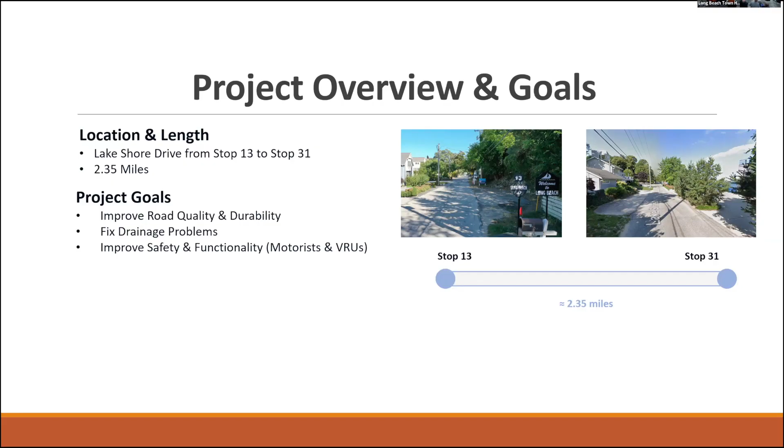And also, anytime we're doing a project of this scale, it definitely makes sense to take a look at improving safety and functionality, not only for the drivers on the road but also the other users of the road, VRUs, which are vulnerable road users. So that would include basically anybody that's not in a vehicle, so pedestrians and bicyclists.

So with improving the safety and functionality of the road, especially in the context of this road and this community, you want to at least attempt to achieve a complete streets approach, which is basically designing the road corridor for all users, not just motorists. So we want to provide some safe spaces for vulnerable road users. I don't think sidewalks are probably in the cards for this, but we can still accommodate them, and we'll talk about that as we go.

We also want to increase driver visibility and awareness, control vehicle speeds. Usually lower speeds result in safer roads, and then improve signage for drivers as well.

So as mentioned, we wanted to touch a little bit about this report that Haas and Associates has put together and is available on the website. Just really want to clear the air on that a little bit, because I think some people may have read it and misinterpreted what it is.

Really it's a document to determine the budget for the project. So we look at a couple of different conceptual projects on one end of the spectrum and the other end to understand the real scope in terms of cost mainly. Then, knowing the different costs we could have with this project, we project out the phasing based on the anticipated project funding mechanism, which is through a state grant. There's some talk in there about road widths and things of that nature, but that's just so we can understand a high end and a low end of what the project could be. It's not a design.

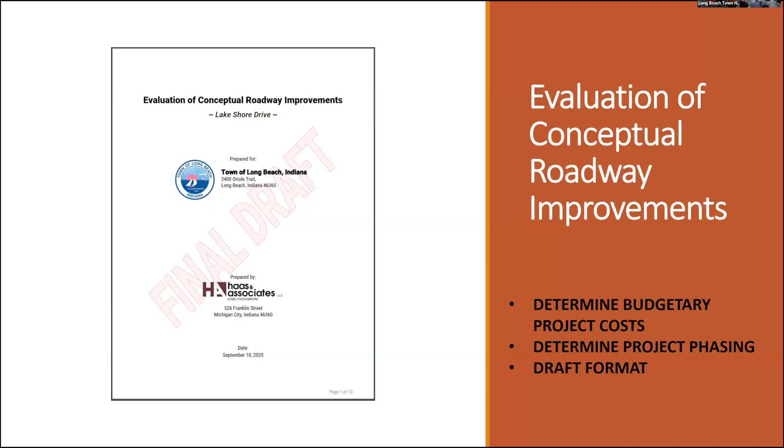As Joy mentioned, we're still very much in the conceptual phase and need input from the community. So the final point here is that this is still a draft document. We're in the conceptual stage, it is not finalized yet, and we are also not in preliminary design yet. There's still a lot to happen before things really get moving on this project, and input from the public is very important and necessary.

So with that, I'm going to go ahead and turn it over to Sam.

Good evening, everyone. So the pavement along Lake Shore Drive exhibits visible signs of aging, as shown in the photo, with multiple types of surface distress, including reflective cracking. According to town officials, the road was last paved in the 1990s, and prior to that, the original concrete pavement has been paved over time.

Reflective cracking occurs when cracks or joints in the underlying pavement layer, typically concrete or asphalt, propagate upwards through the asphalt overlay. It's termed reflective because the crack mirrors the distress in the underlying pavement, which reduces the ride quality and durability of the road. In addition, differential settlement resulting from variation in the base material across the road cross-section contributes to this type of crack. Once the crack forms, moisture infiltrates into it, and because of the freeze-thaw cycle, the road deteriorates further, reducing ride quality and shortening the pavement's service life.

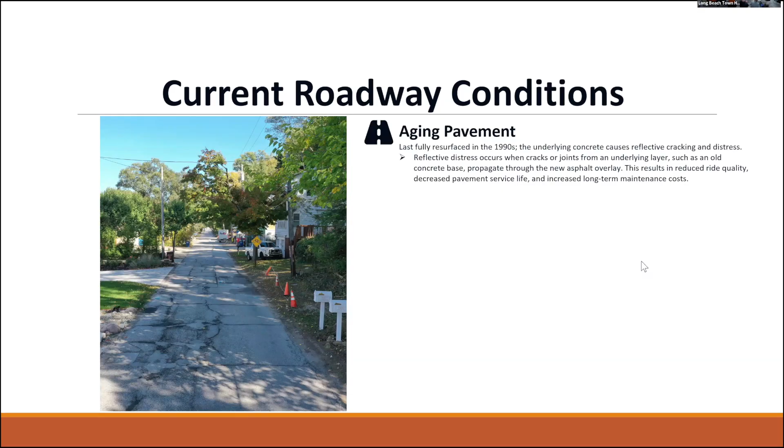Next slide. Now, core samples were obtained along Lakeshore Drive, and they confirmed the presence of concrete underlayment along the roadway. However, the lateral extent of this concrete underlayment was not verified and has not been verified.

As you can see, we have three representative core samples shown on the screen. The first one shows about 7 inches of concrete, and you can visibly see that the asphalt has been overlaid over time. The same is true with the second one, with the broken up concrete underlayment that will likely reflect and cause reflective cracking on the surface. The third core sample does not show much concrete at all. So that's how it varies along Lakeshore Drive.

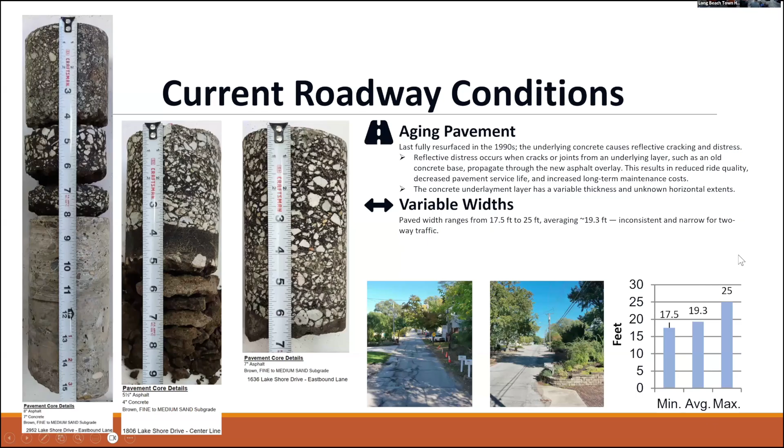Also, more than 50 cross sections were measured along the road corridor from stop 13 to 31, revealing roadway width that varies between 17.5 and 25 feet, with an average road width of 19.3 feet. The roadway is currently being shared by motorists and vulnerable road users, and currently, as we all know, there is no continuous sidewalk along the corridor.

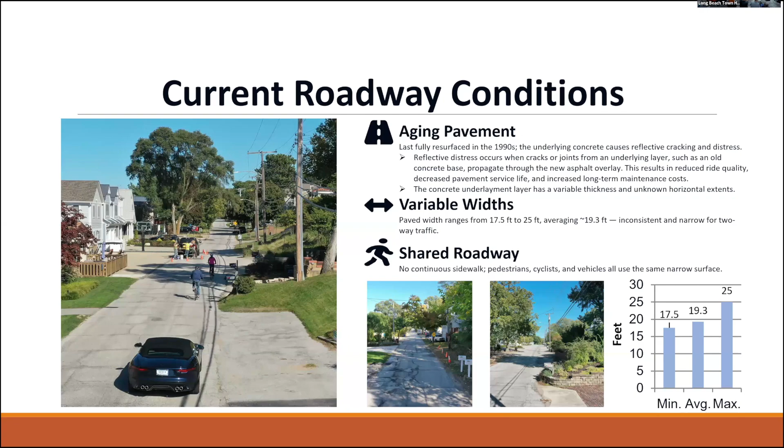And I will turn it over to Ryan to talk more about the technical standards that are relevant to this project.

Thank you, Sam. So before we get into more details about pavement strength, pavement durability options, and some of the functional options available for the road, we want to touch a little bit on technical standards. We think of these in two different categories: some are requirements that must be adhered to, and others are more like guidelines.

Some of the standards we need to adhere to include Indiana code, local code—that'd be Town of Long Beach code—and the guidance in the Manual on Uniform Traffic Control Devices. That's really a federal requirement for all states, and it covers signage, lane markings, lane widths, and things of that nature. Then naturally there's the Americans with Disabilities Act, which governs how roads are designed for people with disabilities.

We also have other standards, more like guidelines, that don't necessarily have to be adhered to for this particular road. This may include things like the Indiana Department of Transportation Design Manual, which would be very applicable for a state road like a highway, but that's not what we have here—we have a local road. Another one would be the AASHTO Green Book. AASHTO stands for the American Association of State Highway and Transportation Officials, a very detailed, highly regarded, nationally applicable standard for designing all kinds of roads, from highways down to local roads. A very useful document, but it does not need to be strictly adhered to for this particular road.

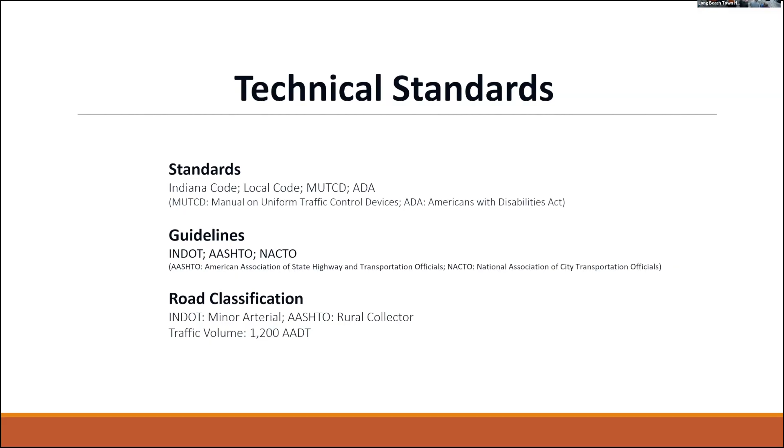As we move into the functional possibilities for this road, it's important to consider what classification this road is, since depending on who you ask, it might be classified differently. To illustrate, INDOT classifies this as a minor arterial road. Arterial roads—even minor ones, as opposed to major arterial roads—are generally higher volume roads with higher speeds, meant to get people from point A to point B. If you look at how AASHTO would classify this, they would tend to classify it more as a rural collector road. I know this isn't in a rural area, but that's still how it would be classified—quite a difference in how they consider it.

In our minds, looking at this from a design standpoint, we're thinking of this road as a major collector. You have your local roads out in front of your house, which feed into a slightly larger road, and those roads dump into Lakeshore Drive. So we think of that as more of a major collector that feeds out to Castleton or Moore Road, which are more arterial roads.

Traffic volume on this road has been measured by INDOT at approximately 1,200 vehicles per day. That's an average value for a given day, averaging out highs you might see in the summer and lows in the winter—so it's an average, but useful for comparing it to other roads.

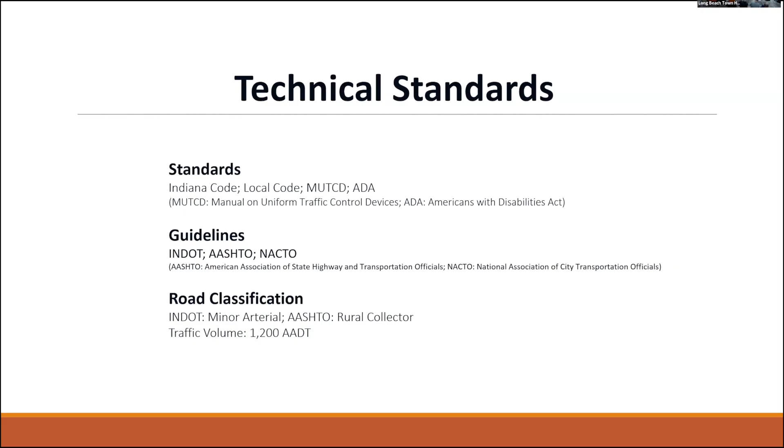With that, we're going to move in and talk a little about pavement strength and durability, and what options are available to the town to improve the quality of the road. After we get through that, we'll talk more about some of the functional elements of it. So with that, I'll pass this over to Sam, and he can talk to you about the pavement quality.

There are three pavement improvement options evaluated for Lakeshore Drive. The first is milling and paving of the roadway. This option involves milling and resurfacing the existing pavement surface. While it provides a smoother ride compared to what it is right now, it does not address the non-uniformity of the underlayment. The estimated service life for this treatment is approximately 5 to 10 years.

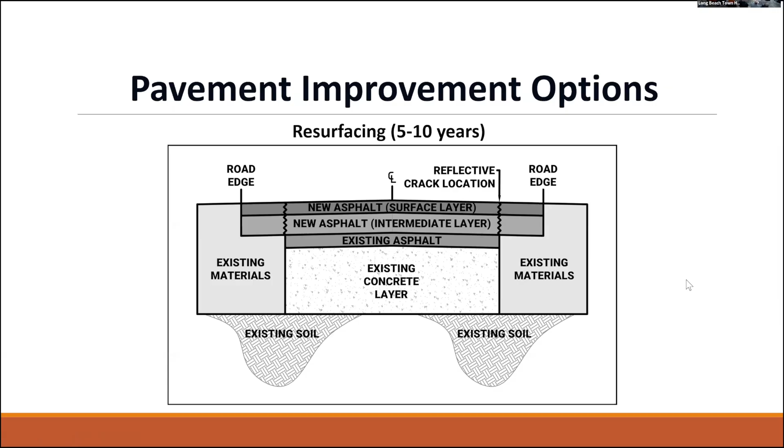The second option being considered is base strengthening—that is, strengthening the base adjacent to the concrete underlayment with good base material, then resurfacing the road while also reinforcing the asphalt layer. This is actually more durable than the first option presented, with an estimated service life between 10 and 15 years.

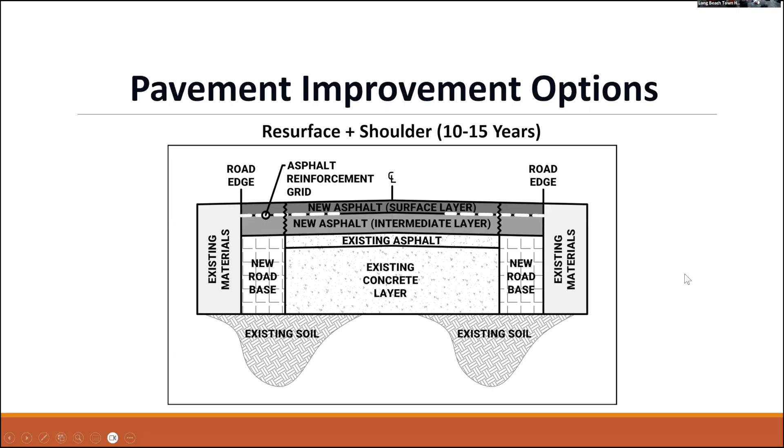The last option, a premium option, is the complete removal of the existing concrete underlayment and replacing it with good base material. This option will be the most durable of the three, with an estimated service life between 20 and 30 years if taken. With this, I'm going to turn it over to Ryan to talk about the functional improvement options.

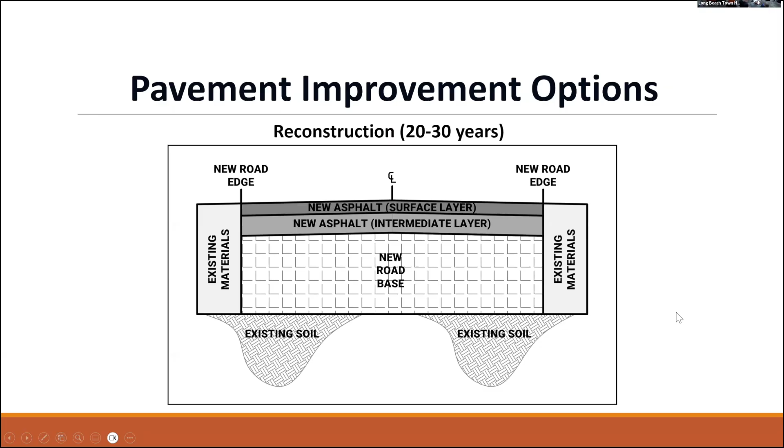Okay, so we're going to talk about a few different things regarding how this road will be designed and how it will function, starting with lane widths.

Under certain circumstances, narrower lanes can promote lower speeds, which in turn reduce crash severity. That's especially true when the road speed is around 30 to 35 miles per hour. In this case, the road speed is 20 to 25 miles per hour, and in that circumstance there's not any statistical evidence that lane width actually has an effect on crash intensity or frequency. Really, the controlling element there is speed, not lane width.

So in our case here, the decision is really more about maintainability and how best to use the limited right-of-way available to the community. So there's some different options to consider when thinking about lane width.

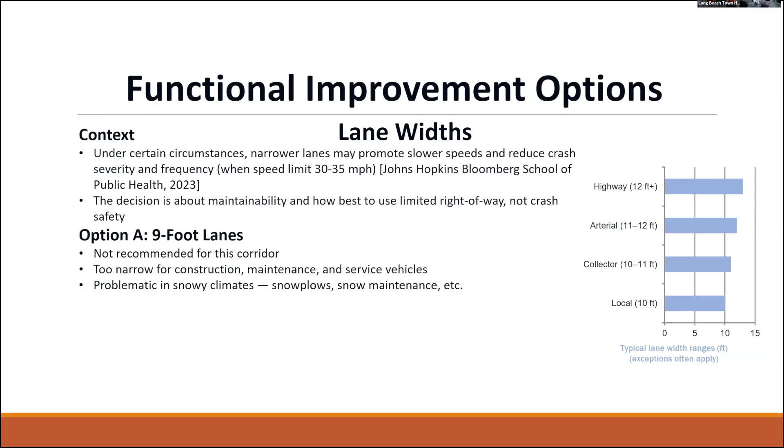9-foot lanes are a possibility, although they're really kind of too narrow for this particular corridor, especially given some of the construction and maintenance vehicles that tend to occupy the road. 9-foot lanes can also be somewhat problematic for snowy climates, and this area, as you know, can be subjected to lake effect snow.

So for those reasons, 9-foot lanes is not really a preferred option. 10-foot lanes is more preferable. It's kind of a balance, and it has a better ability to accommodate some of those bigger vehicles. It also gives a little bit more space for vulnerable road users, and again doesn't limit access for essential vehicles.

11-foot lanes, you're starting to get up there a little bit. There's not a lot of added benefit there, especially if you're not a heavy truck freight route or a bus route.

And as you start to increase those lane widths, you can tend to have a little bit more comfort for drivers, which can make them feel like they might want to go a little bit faster, which again can kind of increase the frequency of crashes.

So the town is kind of leaning towards 10-foot lanes right now, but that's really just a placeholder while waiting to get input on all these different topics from the community and make final decisions as we go.

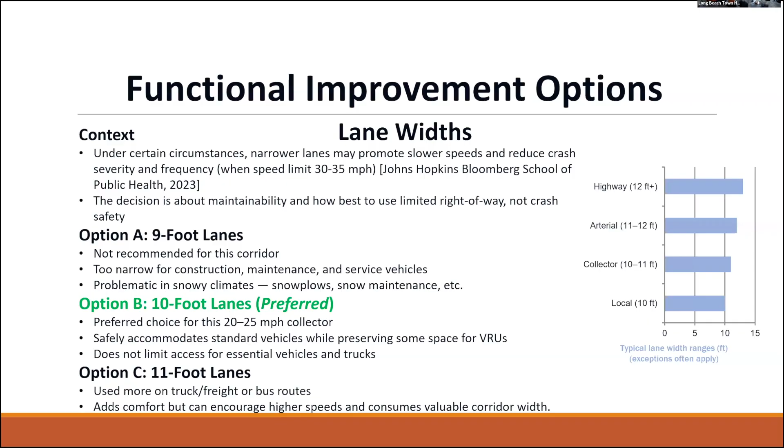So the next concept here is center line markings. As you can see here, everyone's familiar with these. They're actually optional for this type of road, and in this context you don't need to have one. So one option is to not even put a center line in there at all.

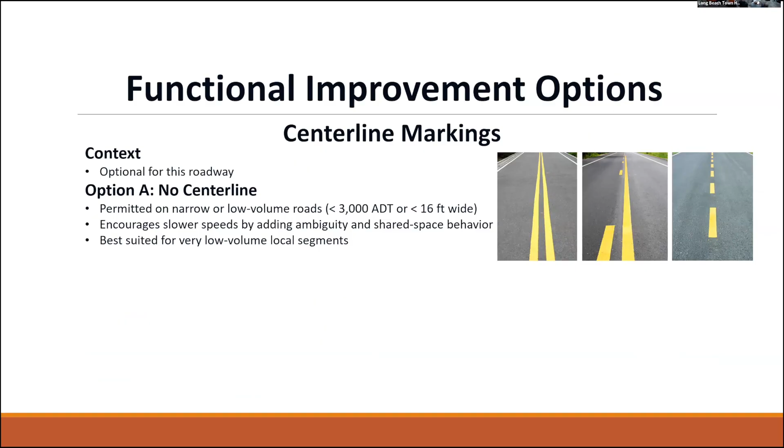That has some different trade-offs. It can encourage slower speeds for drivers because it creates a sense of ambiguity about what's happening in the roadway, which can heighten driver awareness and cause them to drive more cautiously, which usually results in lower speeds, and lower speeds usually result in fewer crashes. It's also best suited for a lower volume road, which this happens to be, so it's a potential option.

Another option is a double solid yellow line. Those are meant to prevent any passing of vehicles. You might do that in areas where there's a lot of curves in the road, or higher speeds, or it's just dangerous. That's not really applicable on Lakeshore Drive, since as you know it's a very straight road with not very many vertical curves.

So it's kind of restrictive, almost too restrictive. Sometimes if you're driving on a road with this center line marking, you may actually believe that you're not able to move across that line, and that can actually be detrimental to the safety of vulnerable road users, because the driver may feel they can't go over that line, even though maybe they can. So it could have some negative impacts.

Option C is a dashed yellow line, and this is good to use when you have adequate sight distance and people can actually pass. It's also applicable on a road with lower speeds, and it can help give people a little more flexibility in terms of maneuvering around obstacles, without that downside of the double solid line where drivers might feel like they can't maneuver around obstacles. So it's kind of a good balance between the other two options.

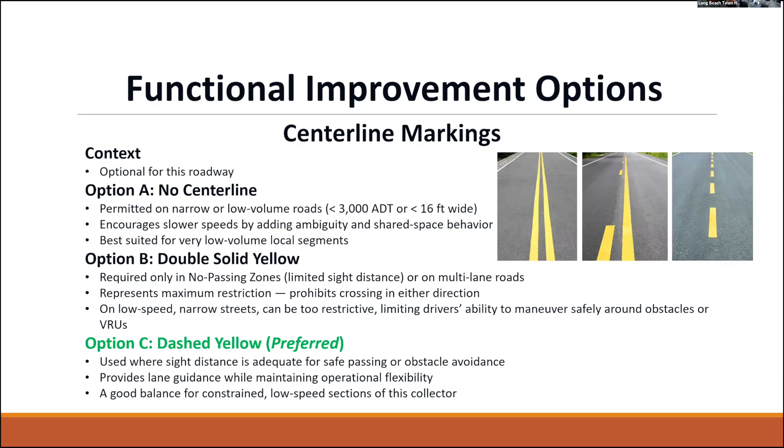So moving our way out, we'll talk a little bit about edge lines here. Those are the solid white lines that you sometimes see on a road. Again, you'll see a pattern here for this kind of lower volume, lower speed, local residential road. These are optional, so there are some options we have here.

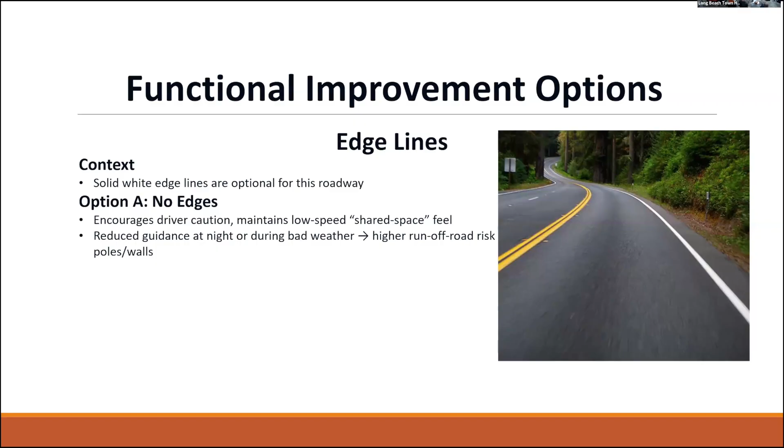Similar to the center line, we could do no edge marking at all. This creates an environment of ambiguity for drivers, which causes them to drive more cautiously, usually resulting in lower speeds and less crash frequency. It helps create that shared space feel, and in a road corridor like this, where you're expecting a lot of different users, it can help slow down drivers and lower crash frequency. The trade-off is there's a little less visibility for drivers, especially if there are things close to the road they could potentially strike with the vehicle.

Option B is just a continuous edge line all the way along the entire corridor. In contrast to the previous option, this provides very good guidance to drivers, but it could create too much of a comfortable feeling, which can increase speeds. It also increases the cost—you've got more stripes to maintain out there. So there are some downsides to this option.

Option C—and I think as you'll see, most of what we're talking about ends up with a tailored approach. That's what this unique corridor really demands; a one-size-fits-all solution isn't typically going to work for this road. Selective application of edge marking could be helpful to guide motorists around obstacles close to the road. It's also useful when used in conjunction with a shoulder.

The line helps keep drivers' tires away from the edge of the road. When they start driving over the edge, it can deteriorate and start to crumble. Then water can intrude, and as Sam mentioned before, you can have that freeze-thaw cycle, which is really a positive feedback loop that doesn't stop, and the road deteriorates year after year. So keeping people off the road edge is helpful, but maybe not in all cases, as we'll see when we talk about shoulders next. A selective approach probably seems like the best approach here.

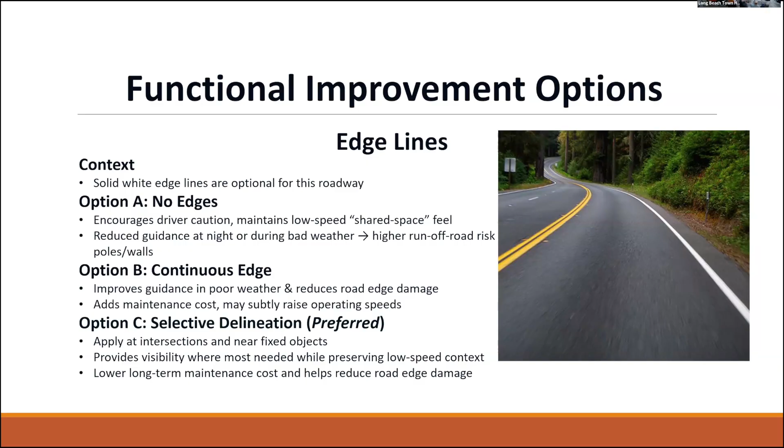Going hand in hand with the edge lines are the shoulders, as I mentioned before. Out here in this corridor, we have a lot of driveways and paved parking areas that really function as a shoulder. The purpose of a shoulder is to confine and laterally support the road edge so that it doesn't have a tendency to spill out, especially under pressure from vehicle tires.

Right now there are a lot of locations where we already have that lateral confinement and support, but there are some edges where there's just grass or vegetation, and it becomes a little unclear where the edge of the road is—that's when drivers can start to run over that edge. So in those locations, it may actually be helpful to put in a shoulder.

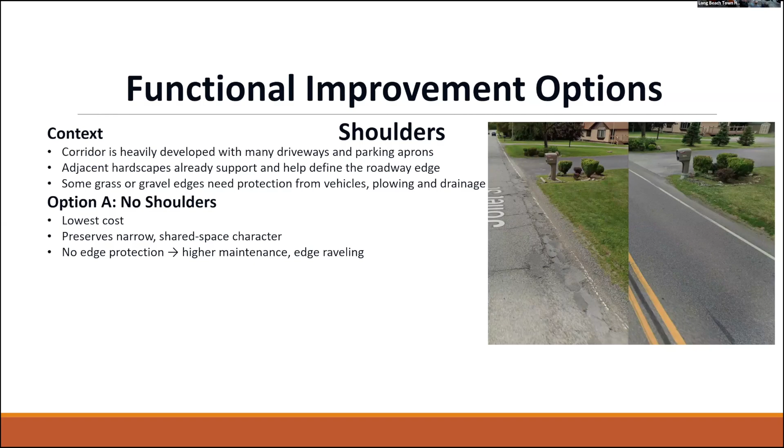Again, multiple options here for shoulders. No shoulders at all is lower cost and preserves that kind of narrow beach feel to the road, but it doesn't provide as much, or any, protection for that edge—which is really protection of your investment, if you want to think of it that way.

Another option is to provide continuous shoulders everywhere, but that's really not necessary given how many driveways and the density of parking areas out there. Those are already kind of helping protect the edge of the road, so providing a continuous shoulder isn't really necessary out here.

As I mentioned before, a middle ground is probably the best bet—selectively placing new shoulders where we have vegetation, dirt, or gravel adjacent to the road, just to help protect that edge and keep drivers away from it. It wouldn't be everywhere, just in locations like you can see in this picture to the right, which is a good example of where a shoulder might be useful.

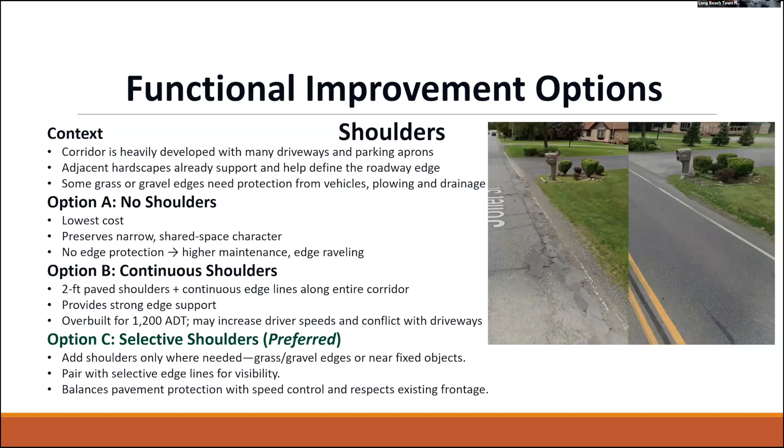So finally, before we look at a couple of conceptual exhibits of possible ways that the road could look out there, we want to talk about lateral offset.

AASHTO defines the lateral offset as a desirable distance from the edge of the travel lane. You could think of that as the white line, or if there's not a white line, just the edge of the lane, wherever that may be, to the nearest vertical object, such as a power pole, retaining wall, mailbox, or any kind of vertical object that could be a hazard for vehicles to strike.

So the lateral offset is sort of an elimination of those types of objects within that offset distance, and it helps provide a buffer between vehicles and those objects, and provides a little bit extra space for snow storage and maintenance access as well.

With this particular corridor, we know there's a lot of encroaching private property that will limit the ability to achieve the desirable lateral offset clearance. So that's something that will definitely have to be a tailored approach. But the goal is really to achieve a reasonable amount of separation between the road and these objects while still preserving the corridor character, and not just extruding one lateral offset all the way along the entire corridor and taking out everything that's in the way.

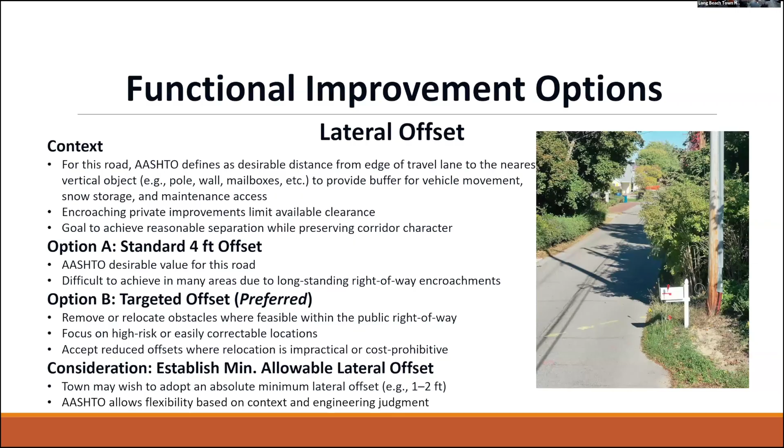But that's really up to the town to decide. I think that's something that should be considered by all stakeholders in this project: is a minimum lateral offset desirable? Does the town want to state we will achieve 1 foot or 2 feet of lateral offset everywhere along this corridor, or are they willing to accept 0 feet of offset, or something in between? So it's something to consider.

I will say that AASHTO doesn't consider this to be one of the highest priorities, so they do allow for flexibility and engineering judgment on this. So again, a tailored approach with this, as with many of these things, will be the best approach.

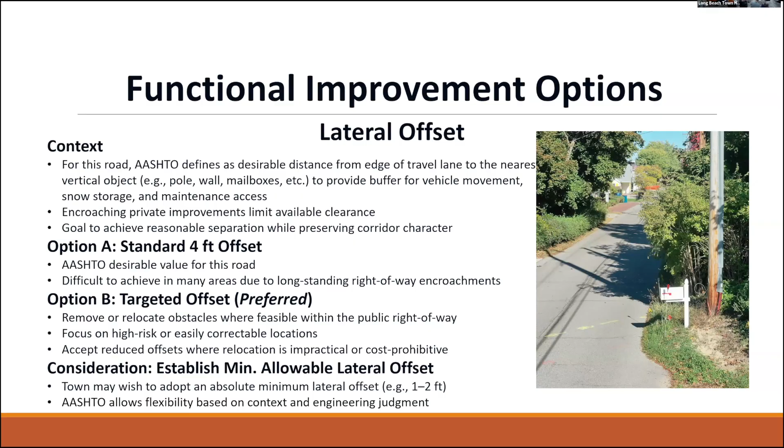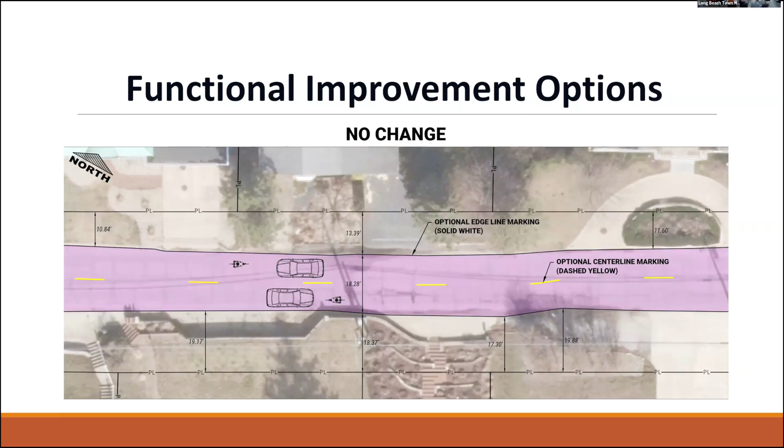But it's important to note that when we go to align this road, it will have to be done in a selective case-by-case basis. We're not just going to put it right down the center of the right-of-way. I don't think that would be the best use of the town's resources. So again, a tailored approach to that alignment will be essential.

The next option we have here is really very similar to this one. The only difference is that we're showing a shoulder. As I mentioned, it's probably best to apply that selectively in certain areas, as in some areas where we already have a lot of impervious, permanent asphalt and concrete surfaces adjacent to the road, you don't necessarily need a shoulder there. Kind of redundant. So those are some options to consider.

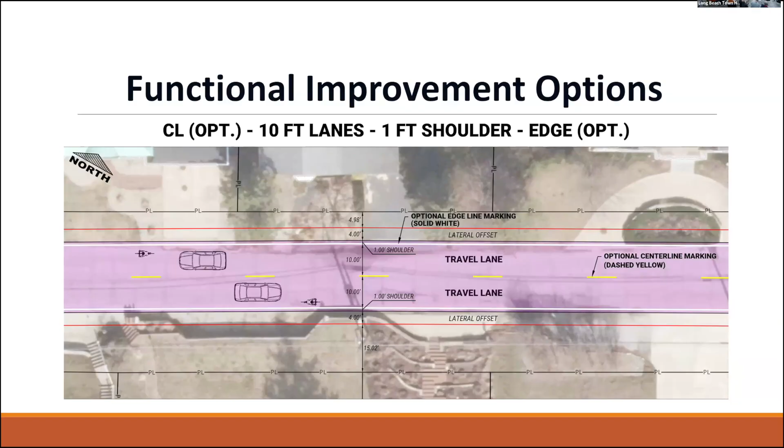So with that, I'll turn it over to Sam, and we can pull back and talk a little more about the overall project cost, what we're expecting, and the project timeline as well.

To date, 4 preliminary improvement options have been considered in this project, with estimated costs ranging from 2.8 million to 5 million. As Ryan mentioned, the first option is just to mill and resurface and leave the alignment as is. The last option is full reconstruction and functional improvements of the road.

These figures are conceptual and intended for budgeting purposes only. They do not include potential costs for the associated utilities, that is relocating power poles, and they also don't take into consideration the soft costs that will be incurred in the project.

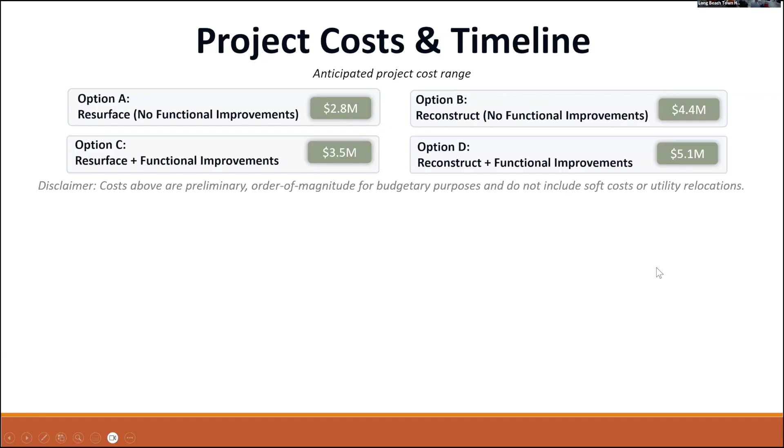The town intends to pursue funding through the Community Crossings Matching Grant program. Over the past 6 years, the town has received approximately $3.4 million in CCMG awards. The CCMG is a 75-25 matching grant, meaning the town contributes 25% of the construction cost while the state contributes 75%.

This program is awarded annually, with a maximum grant award of $1 million. The next application for this program is in the summer of next year, July of next year.

If everything holds, the project schedule is anticipated to be as follows: commencing the preliminary design this winter and finishing it up before spring. Then the final design should be concluded sometime around the end of spring, ready for the grant application.

If everything works out well, the first phase of construction should start in the fall of 2026. Depending on the option chosen by the town, this will tell us how many phases, how many years this project would go.